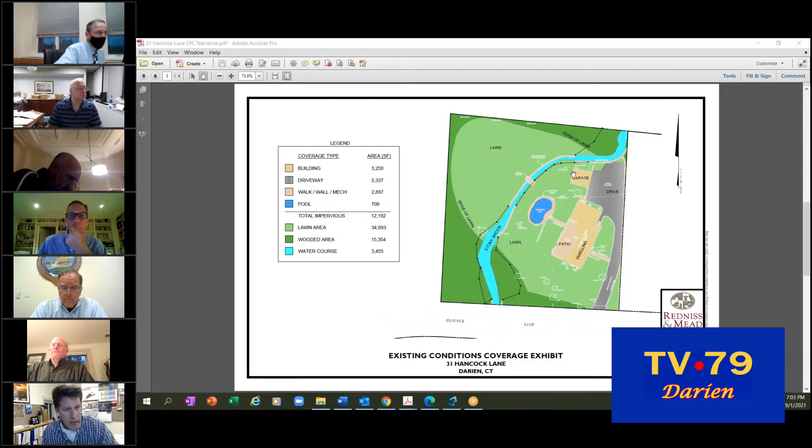All right. I hope you see it as I do, which is a project that is going to have a positive net benefit on the adjacent downstream wetlands and water courses.

Very specifically, you see here on our color plan the existing condition for 31 Hancock Lane. This is just east of Hollow Tree Ridge Road on Hancock Lane. You see in clear light blue, the Stony Brook cuts through the middle of the property. You've got the existing drive on the east side of the property leading to a detached garage quite proximate to the brook.

And the driveway, in fact, pretty much abuts the brook on that north edge. You've got the existing residence and patio on the east side of the property here, and you also have an existing in-ground pool between the existing residence and the brook. A fair amount of the property today is maintained as lawn.

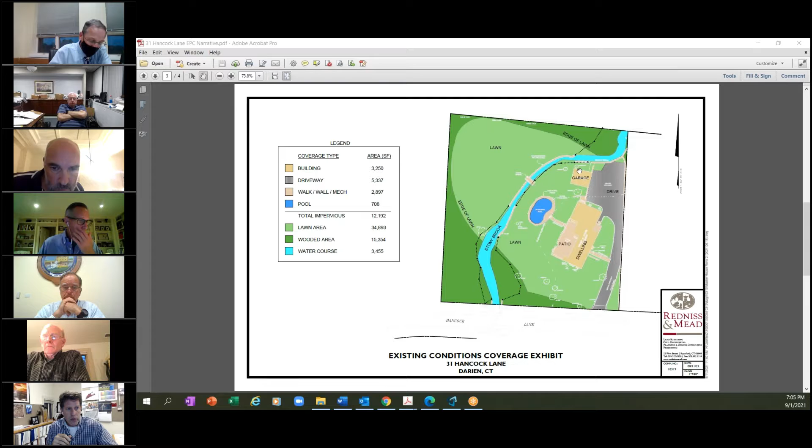So I'm going to toggle between the existing condition and the proposed condition to give you a sense of the changes that are going to be made. So it's existing, and here is proposed. You will note very quickly, if you focus on the garage and the driveway here by the brook and the pool, that as I toggle to the proposed condition, those elements all go away.

So the driveway is pulled back from the edge of the brook. The detached garage is removed, and a new attached garage is created closer to the main dwelling. The pool is removed and not replaced. And then there's some additions around the main dwelling.

A lot of the additions have to do with the desire by the applicant to have a master bedroom down. He's an older gentleman and just at the right life stage for that choice. So we have a lot of pluses and minuses on that main living floor to make it usable for the new owner.

So at the end of the day, we've got a net reduction in impervious coverage of something like 1,600 square feet, immediately improving drainage conditions off the property. We are moving some of these hardscape improvements like the garage, the drive, and the pool farther away from the resource. The pool is gone entirely.

The other things that happen are the existing septic system is actually set in groundwater and it's not doing very well.

We've got to replace it. So we end up replacing the septic system with a code-complying upgraded system that will function better than the one that's out there today.

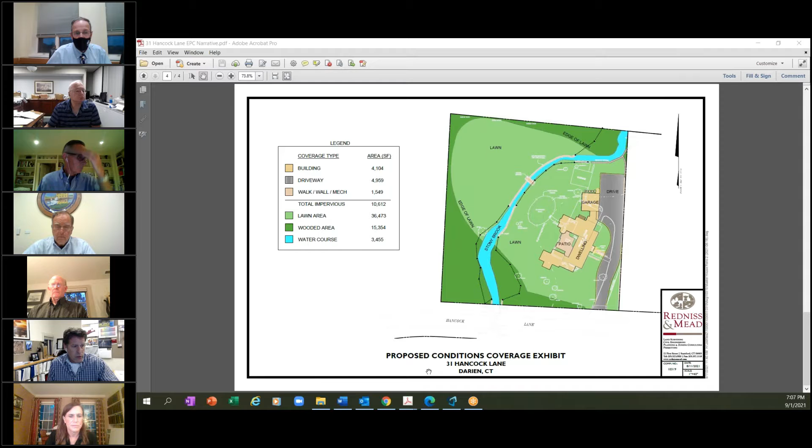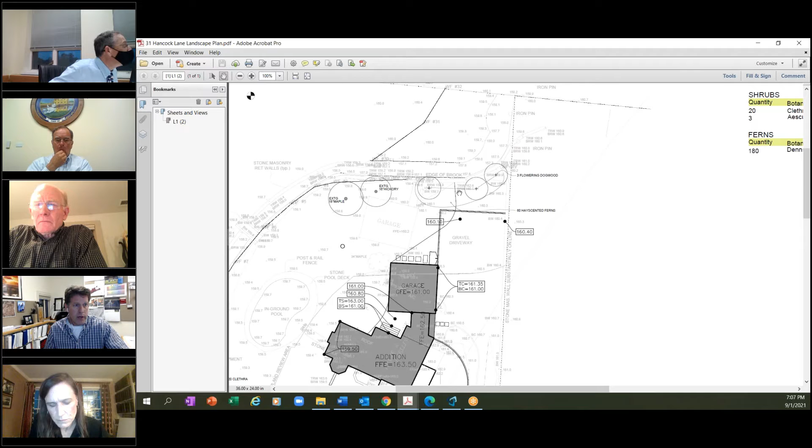In addition to all these items, we do have a landscape plan, a little harder to see virtually here on the screen, but you've got it in your paper packets if you've been looking at it. Very specifically, we focused on 2 mitigation areas to provide more ecologically friendly plantings, or at least not maintained lawn. So we have a planting bed here where there used to be driveway adjacent to the brook 80 hay-scented ferns and 3 flowering dogwoods.

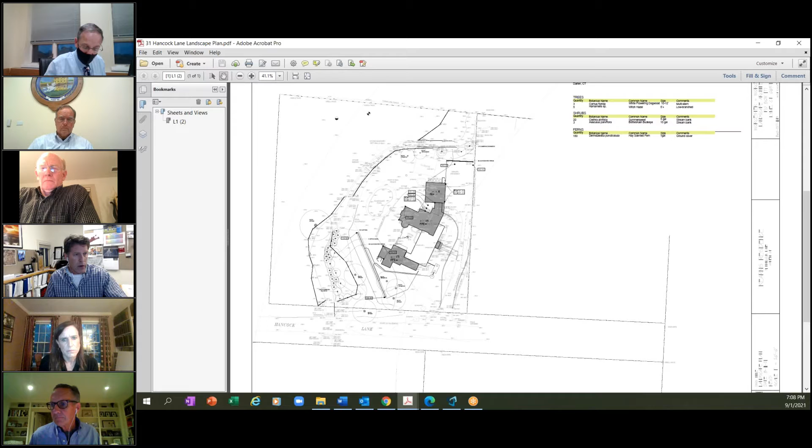And then we focused on the area downstream of this proposed addition, being really kind of a new area and the new septic system. So there's a number of shrubs and trees and ferns, again, being planted in that vicinity as well to augment the buffer to the brook and kind of repopulate that wetland with more natural plantings.

So that's, I think, pretty much the sum total of how we feel about the new improvements as they might relate to the resource.

I should note, just for full disclosure here, although we've got a wetland setback indicated on the plan, it's just the 50-foot wetland setback. And of course, as you know, the Stony Brook has a 100-foot upland review area associated with it, not a 50-foot one. I don't think that really affects the net positives you gain from this application, but I thought I ought to point it out since it wasn't correctly indicated on this exhibit.

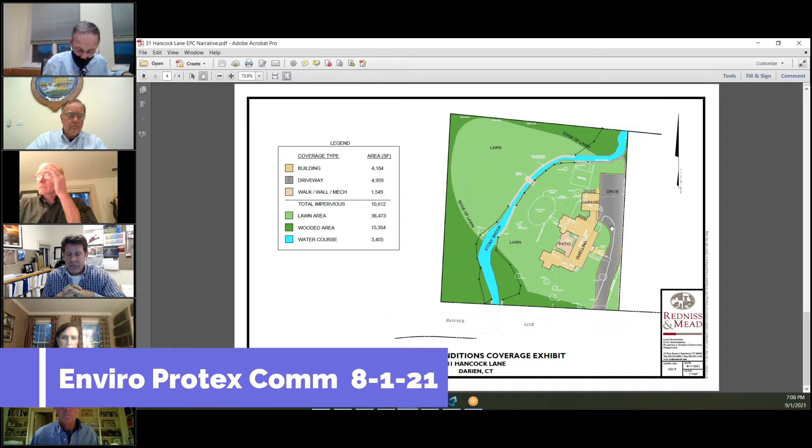And I'm here for your questions. Good, thank you. I'll start with Bill Wright.

I'm very interested in what happened during that 6.5 inches of rain in that location. Obviously, it's in a low area there, and it's been very channeled. But can you tell me what happened on the property when that occurred, and also what happened on the street?

Yeah, so the applicants were not in-house during that storm, so I have no observations from the storm. I do have observations from the storm for the property to the south at 21 Hancock, I think it is, or just across the street, the Morgan residence. I actually have some video there. Their flooding wasn't as bad as it had been in the past, and it was largely confined to a little bit more than the brook.

We've done this in association with our planning and zoning application. We've done a very detailed flood study here because FEMA doesn't assign an elevation to this location. It's too far afield from the main river where they actually have assigned elevation. So we actually went through the process of doing a flood study to figure out the watershed to this property and coming up with a flood elevation.

The flood elevation, even in the 100-year event, is predicted only just to lap up against the edge of the house. The house has never flooded in the past. So I would guess that based on the stuff that I saw for the property just to the south, you might have had water coming up over the banks, but probably not any closer to the house than the pool. Okay, because it does make a really right-hand corner there.

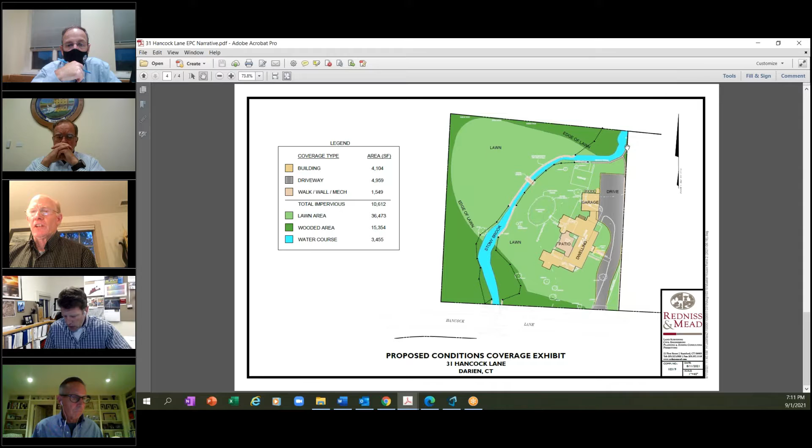So I'm surprised. I guess that retaining wall back there is holding it back. Exactly, that's a pretty stout retaining wall. I don't know if you've seen it in the field, but it's a good at least 6 to 8 feet tall.

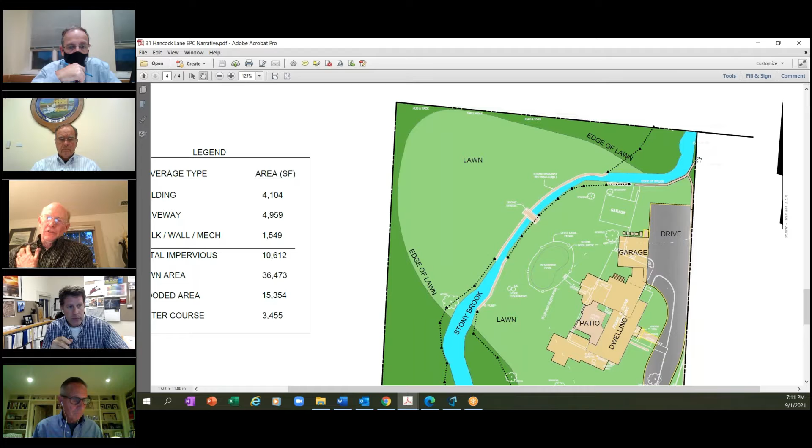Was built by some prior owner to serve that purpose of making sure the brook was deflected from the house. And how about the road? There's 3 culverts down at the end. You don't think it went over the road down at the end as well? Yeah, it has gone over the road in the past. Back in the 2007 storms, it went over the road. I don't have confirmation of whether or not it went over the road.

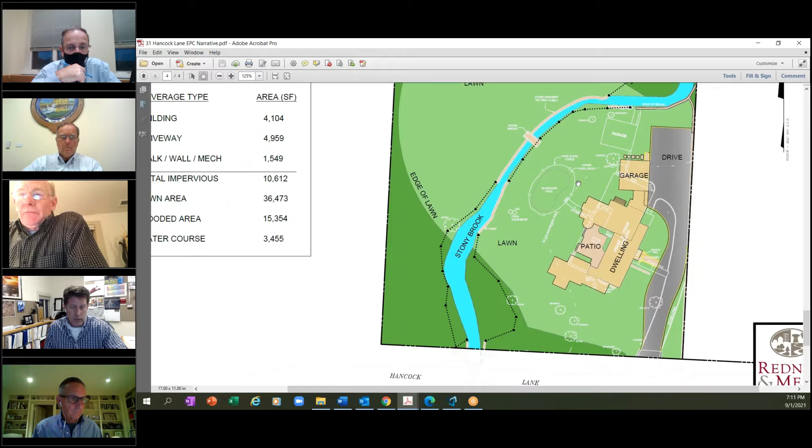I guess the only reason I'm bringing this up is Stony Brook took a lot downstream. It really wiped a lot of places out, and this is a tributary to that up there. So I'm just concerned, I don't know if there's any way to improve that. Obviously, that's been channeled out so dramatically, there's probably no way to slow it down. But I guess the other item is that with only 25 feet from the wetland zone is the new septic. And if that gets flooded over the top, I don't know how that operates, but I can't imagine having a lot of water over the top of the septic is good for a septic efficiency system. So I don't know, I mean, I wish you could push that septic back further. And I guess there is no sewer systems up there.

There's no town sewer system on that road. No, the town sewer is not close.

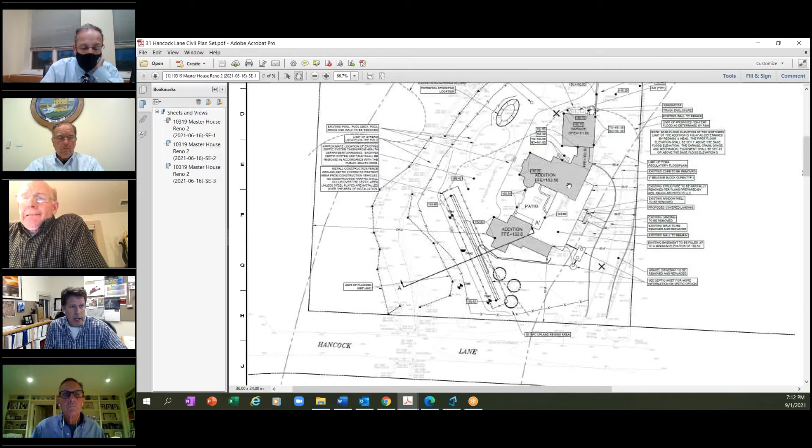We did indicate on the more technical civil engineering document where we're predicting the 100-year flood elevation on the property, so it's right at the edge of that system. And that's again the 100-year storm, not these slightly less intense storms we've been seeing, although they've been pretty intense. So I wouldn't expect that a storm like July would reach it.

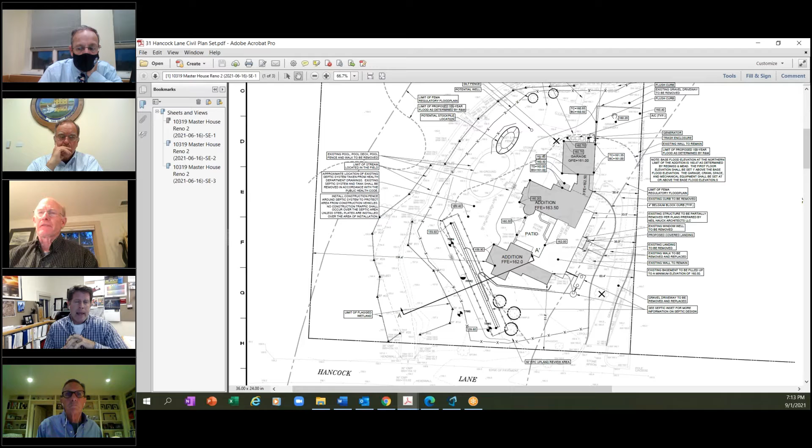What did they consider that storm? Do you know what that one was considered in our year? Every storm, every watershed has its own critical storm. When you have a larger watershed, a storm has to rain for a longer period of time for all of that water to get to some common downstream point. If you've got a smaller watershed, the critical storm could be a very intense thunderstorm that only lasts an hour, because that's the critical storm for that watershed. So every watershed is a little bit different.

But I would say for the Stony Brook watershed, which is larger, it was something more like a 25-year event that we saw on July 9th. For some smaller, flashier watersheds, it was more significant because, if you remember, it rained a couple inches the night before, then stopped overnight, and then rained about 4.5 inches in 3 hours that morning.

The only other comment I have is, because you're only 25 feet from the wetland, it would be nice if that whole wetland area - I'm talking about the south section - was populated. You've done a section of it, that's good, but it'd be nice if you populated it all the way to the wetland line and then put some demarcation there that would permanently prevent it from going back into lawn.

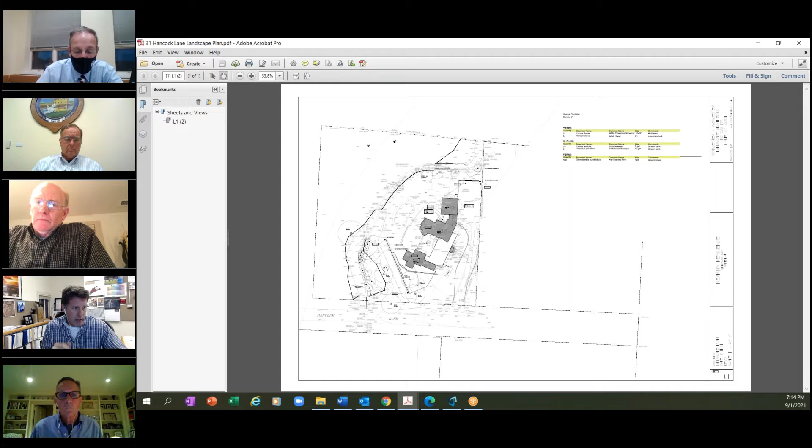So somewhere between the septic system and our proposed plantings on the landscape plan, you would like to see physical demarcation? Yeah. Okay, that's fine. I think that would be amenable to doing something like that. I wouldn't want to do a fence for it - that might be its own obstruction, but maybe some artfully placed boulders might work in this scenario. Yeah, thanks, that's all I have. Thank you.

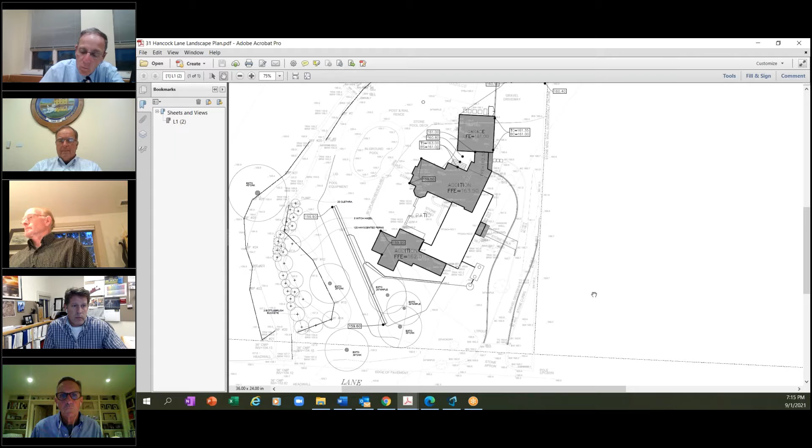Michael Irvin? Appreciate the applicants. Can't hear - your volume is very low. I'll talk louder. So Craig, I appreciate the applicant's design and I have no questions. Thank you. Thank you.

Jim Millard? Consistent with Commissioner Irvin's thoughts, I have no additional comments, Mr. Chairman.

Okay, thank you. For me, Jeremy mentioned that this is going to go in front of Planning and Zoning on September 14th, and it will be a public hearing, because it's a substantial alteration and addition, not a replacement house. And also, from my view, he's reducing the impervious surface and reducing the encroachment in the upland review area.

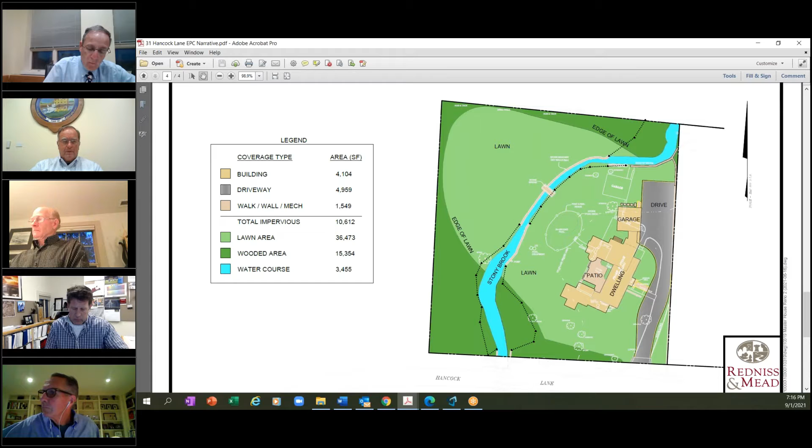I don't think it's necessary to have a public hearing from our perspective, because I think there's net good coming out of this. And so I think that if there are other issues, they can be appropriately raised in Planning and Zoning, and they can manage them. Is that fair, Jeremy? Okay. So unless another commissioner would like to speak, I think we'll draft it up for the next meeting.

Thank you much. Thank you very much, Craig. Yep, thank you very much. We'll see you next time. Okay, quick question - is that application, Jeremy, going to Planning and Zoning for filling and grading? It's going because it's work in the flood zone, Michael. I think there's, because they're doing some of the work in the flood zone there. Okay, thank you. Sure.

Okay, the next item is EPC 31, 2021. Bob Johnston and Susan Latimer, 19 Meadowbrook Road, proposing culvert replacement within the Tokeneke Brook. The site is shown on Assessor's Map number 14 as lot number 9.

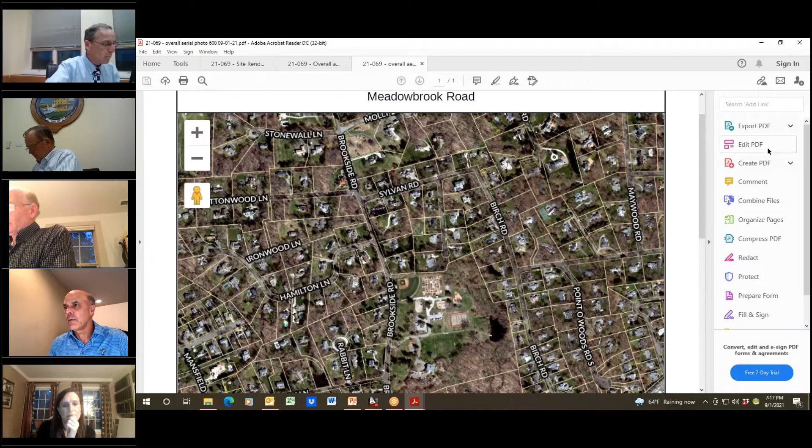Is that Doug? Yes, it is. Okay, Fred, got the screen? Yep, thank you. There we go. Okay, let's get this going.

Good evening, my name is Doug DeVesta, professional engineer, representing the applicant. What we have before you tonight is a head wall. I'll show you some pictures. First, I'll give you an idea where the property is located. Here's Brookside Road, here is Meadowbrook Road, a private road with a number of houses on it, about 8-10 houses.

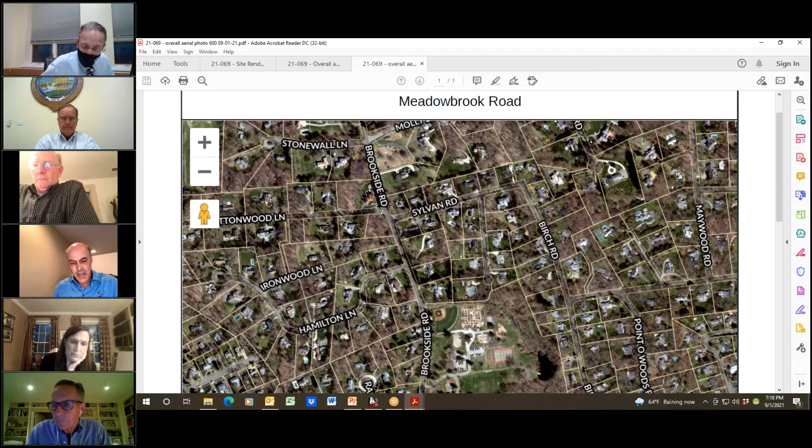It's got the Tokeneke Brook that comes through it, which starts up close to Three Wells Lane, goes under Ridge Acres, Molly Lane, Sylvan, and parallels Birch Road, going through a couple of small ponds in there. This is Cherry Lawn to the pond, and then comes on down. The blue circle here is where the Tokeneke Brook comes through, underneath the road, which is actually a true driveway that services the house on the north and south of the property.

And this is the— wait a minute, I lost that one.

Okay, so what I'd like to do right now is go through a presentation of some slides that we took of the area, so you can get an idea of what we're looking at doing here. This is looking to the east over the culvert.

This is the end wall. To the right is the south end of the end wall, to the north is the head wall. There's plates over here where the road is collapsing.

The next slide is looking west across the driveway serving the two houses. The next photo is the culverts—you'll see this is the Tokeneke Brook. You've got 3 barrels of 36-inch reinforced concrete pipe, or RCP. This is the end wall.

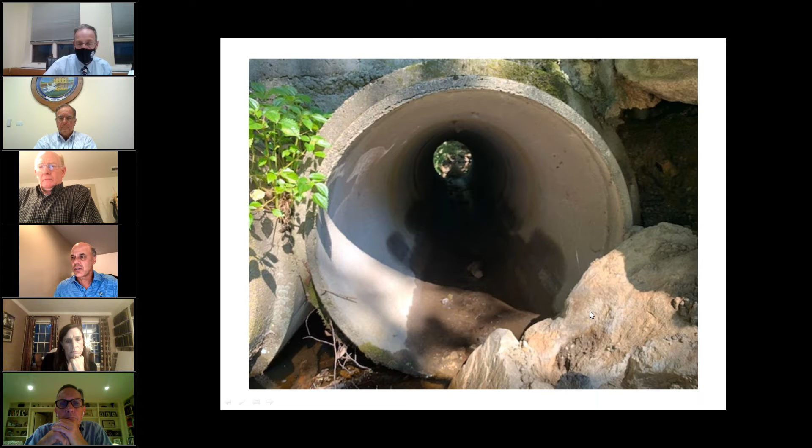Next slide here shows that the wall is starting to crumble down from the easterly pipe. This is the most easterly pipe—looking through it, it's in good condition. This is the stone from the end wall that's blocking it.

This is the middle pipe. Looking through at this end, the pipe all looks like it's in good condition. And this is the westerly pipe, looking back up to the north. This is again looking east at that crumbling part of the end wall.

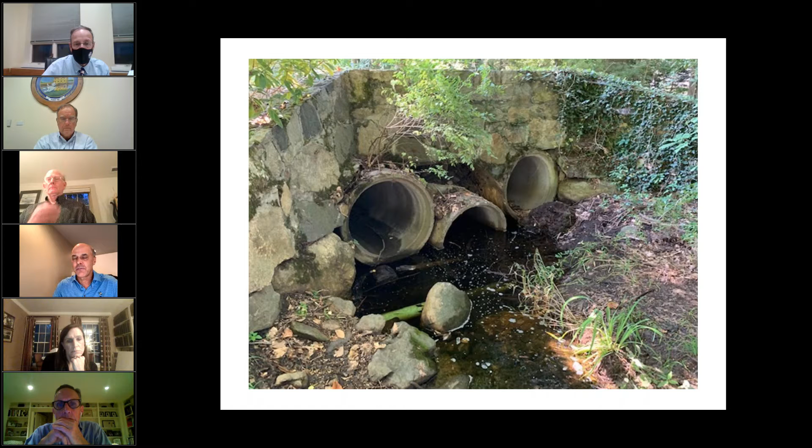Looking now we're on the head wall looking south, so you can see the 3 barrels. The middle barrel pipe has fallen down, but has not cracked or anything like that.

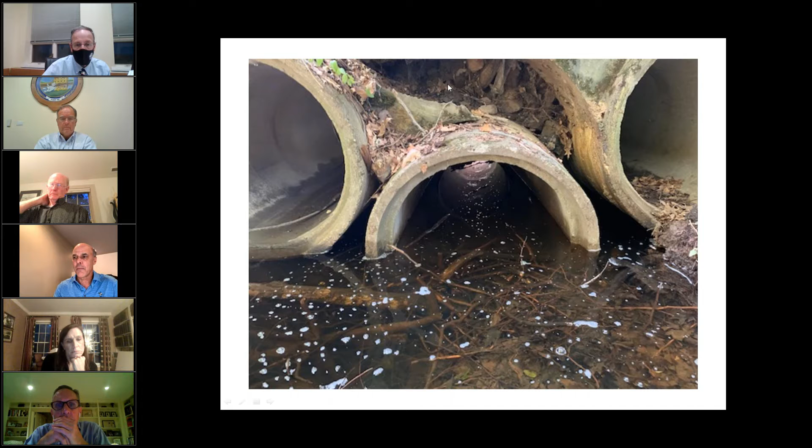This is the easterly pipe again, and this is the center pipe. Looks like what's happened is that over time, the brook has eroded the material underneath the pipe itself, causing the pipe to drop, and causing the road above it to have a sinkhole in it.

And then this is another picture of it. You can see the pipe is in good condition. You can see the pipe going to the south that's still in good condition, but you can see the head wall has collapsed and the dirt behind it has fallen out, which is causing that sinkhole up on the driveway.

The next one is the westerly pipe—it's also in good condition. You can see that some of the dirt around the pipe is starting to erode away.

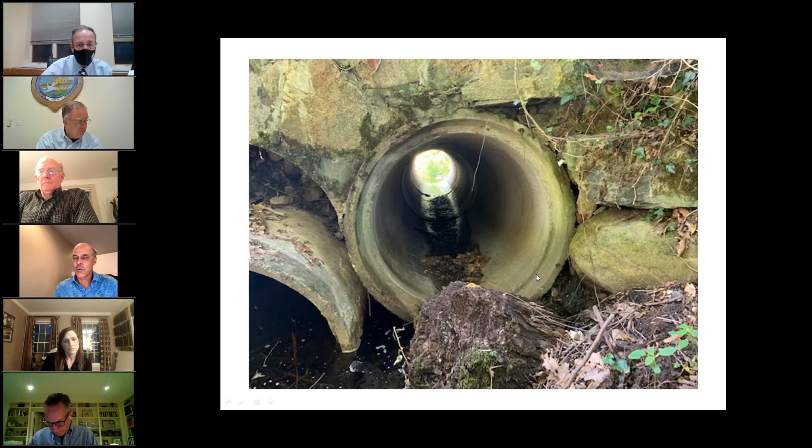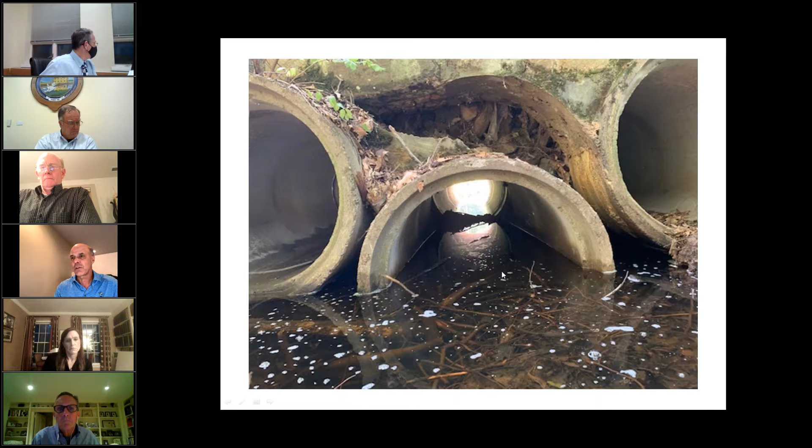If you go back one slide, you'll see that when these pipes were put in, they were placed right next to each other, with really no area to compact the material around it or get it around the sides and on the bottom of the pipe itself. So over time, this has eroded and caused it to collapse.

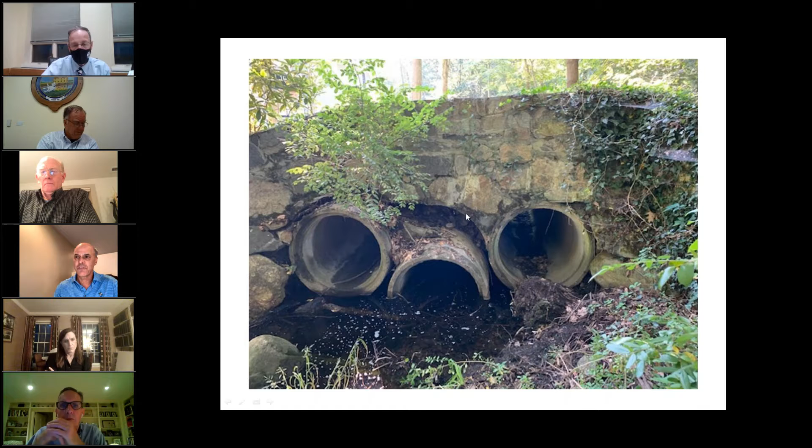The next picture is just an overall view looking down at the pipe, and you can see how much has eroded and how much has fallen down on the pipe. And then the head wall is not in the best of conditions.

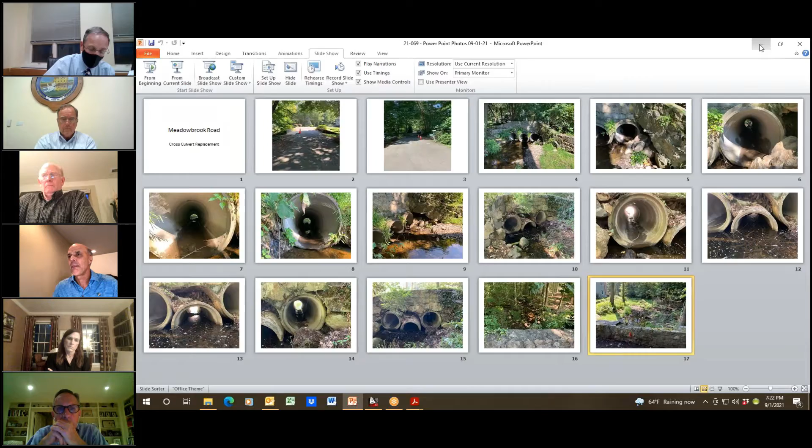So our proposal is to remove and replace the 3 reinforced concrete pipes, construct a footing underneath the inlet and the outlet of the pipe with concrete, and then place the pipes back on it, and then backfill it.

So we're reusing the pipes that are out at the site, repacking the dirt around it with a 2-foot gap in between the pipes so we can get good compaction, bringing it all the way back up to final grade, and then repaving the driveway as it is right now.

We're also proposing to put a modified riprap in front of the pipe, and then modified intermediate riprap on the outlet side to keep the erosion down and to provide some additional protection.

This proposal is also to provide a temporary sandbag dam on the upland, inlet side of the pipe itself. And if there's any more water flowing through here, we'll pump it around to a dewatering pit area that will be constructed with hay bales with riprap inside it. The water will come in here, slow the velocity down, take any sediment out, and allow it to trickle back out into the brook.

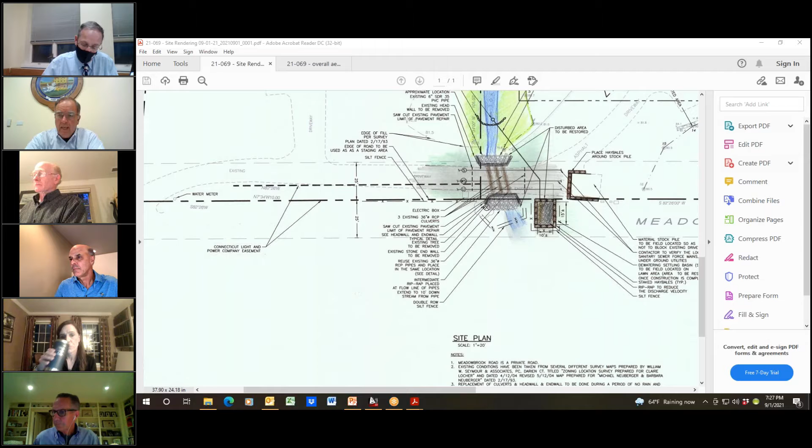Yeah, I'll add, for me this is a safety issue, because obviously you don't want to drive your family in a car over this where the bridge could literally collapse and then talk about issues. So I think Doug's solution is excellent, coming up with the culvert. As far as I'm concerned, this is a go.

The only thing I'd add, and I'll speak to the adjacent homeowners along the river: they should be careful about putting brush and leaves along the side of the stream, because when you have a major event like we're going to have tonight, that'll wash in and block up the stream, and that's the last thing you want on a night like tonight. So if the homeowners on both the north and south could just be aware of that, I'd appreciate it.

Jeremy, you want to write up the draft for approval for next month? Sure, we'll put together an approval for next month. Great, thank you very much. Thank you very much, guys.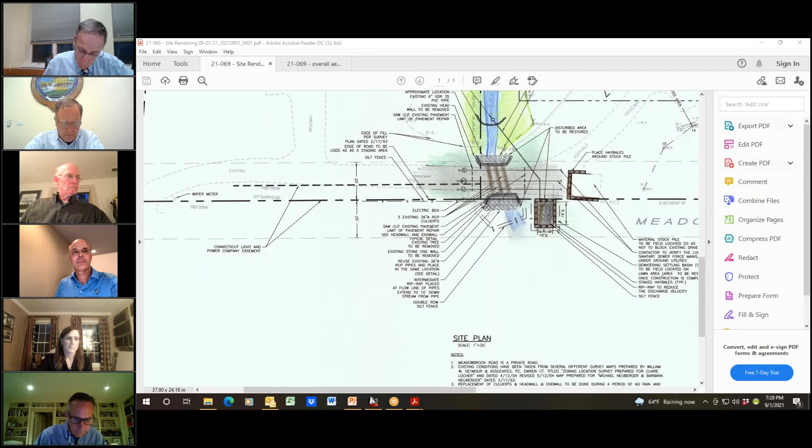Okay, moving on. The next item of business is EPC 32-2021, 91 FMRR LLC, 91 Five Mile River Road, proposing a replacement house and related grading construction in an upland review area. This site is shown on Assessor's Map number 66 as lot number 20.

Who's representing the applicant? Lee? No, Andy Simulidis. Andy, are you there? Excuse me, I'm here. Hello. Good evening, Andy Simulidis, Principal and Professional Engineer with Landtech in Westport, on behalf of the owners of 91 Five Mile River.

The property is bounded by Five Mile River Road on the west, with residences to the north, east, and south. The southeast corner of the property, about 3 feet, abuts the Five Mile River, so it has about 3 feet of frontage along the river. It's one of those peculiar corner-type situations. The property is an existing single family residence with a detached garage, serviced by city water and sewer. The proposal is to demo the existing house and garage and build a new FEMA compliant single family residence.

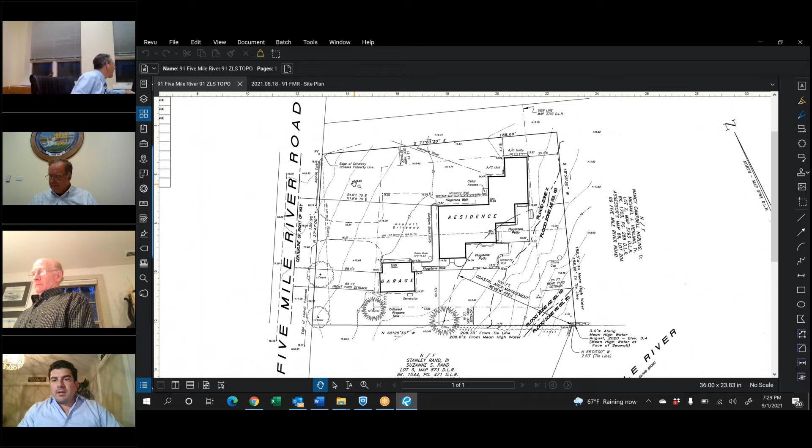Here you'll see the proposal for a new single family residence with an attached garage. The driveway is coming off Five Mile River Road in the same general vicinity, central to the house, with garages both to the north and south. The proposal also includes a new pool and patio in the rear of the property.

I'd like to point out a portion of the property is within the flood zone. This boundary delineates that to the east of that line is flood zone VE15, a high velocity flood zone. To the west of that line is flood zone AE13. Then this flood zone line indicates that to the east of the 13 we mentioned, and to the west of that, it's flood zone X, meaning basically no flood zone beyond that limit. The proposed house will be entirely outside the flood zone.

A small portion of the proposed patio and a portion of the pool will be within flood zone AE13. The proposed single-family house will be at elevation 16.5, above the VE of 15 also — even though it doesn't need to adhere to those FEMA guidelines, it is still elevated in such a position. The house will also be outfitted with a basement, since we're outside the flood zone that would be allowed. In terms of drainage improvements on the existing lot, there are currently none.

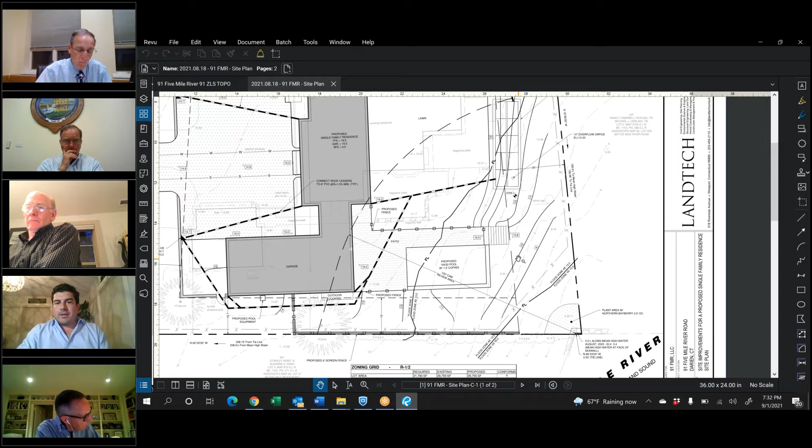What we've also added to this proposal: in this small corner below the seawall, there are some tidal wetlands. We added a planting area of Northern Bayberry, a 10-foot planted buffer just along that corner to further protect it. It is already pretty densely vegetated, but we've added some additional measures.

So that, in a nutshell, is our proposal. I'm here to answer any questions.

As Jeremy will allude to, this will need to go before the P&Z Commission for a CAM site plan approval, which will most likely need a public hearing. And has that been scheduled yet? No, they're probably going to submit — it'll probably be October or November. Okay, in the October-November framework.

Do you want to point out exactly where our area of jurisdiction is? Sure — there is a 100-foot buffer from the coastal resources. That's this corner, this dashed line here. So a portion of the existing house and patios are within it, but predominantly this area is mostly all lawn area. What really falls within that is the pool and patio, and the corner of the garage.

Okay, let's get some questions and comments. Bill Wright — I don't have any. Michael Urban — similarly, I don't have any questions at this time. Thank you. Okay, Jim Millard.

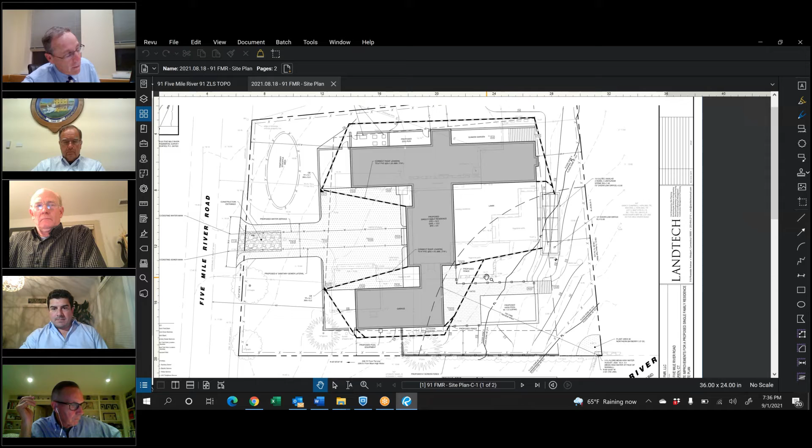It's in the R-1/2 zone. So you got a rear yard of 25.5, and the pool looks to be about 30 to 40 feet from the edge of the seawall. Other than that, it's just grading, and they're putting in the water quality unit in the backyard. The Contech units address water quality prior to draining into the Five Mile River.

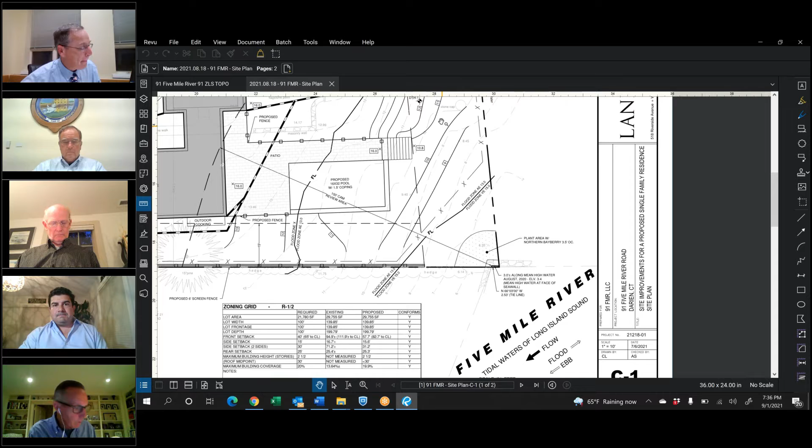Jeremy, thank you. Apologize for my naivete. I just wanted to be sure that I was understanding it better than I originally was.

Thank you so much. Yep, there's a lot of lines on the map, but the big lines are the drainage lines flowing into the water quality Contech.

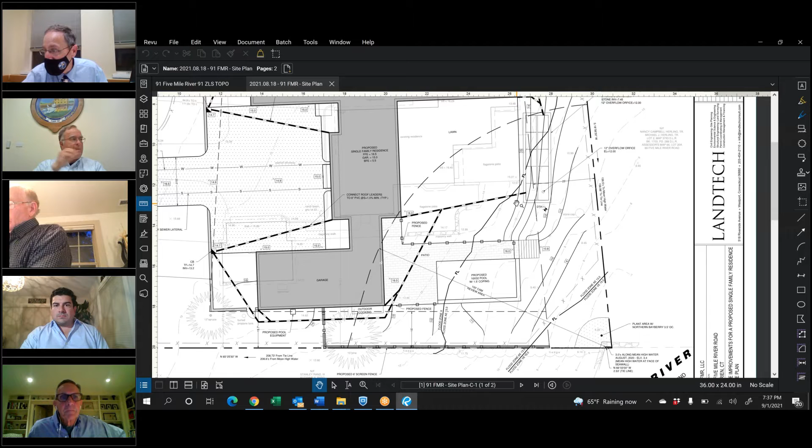Jeremy, just want to make sure that the plantings are Connecticut native species. Yes, the northern bayberry. Okay, I got it. That's good.

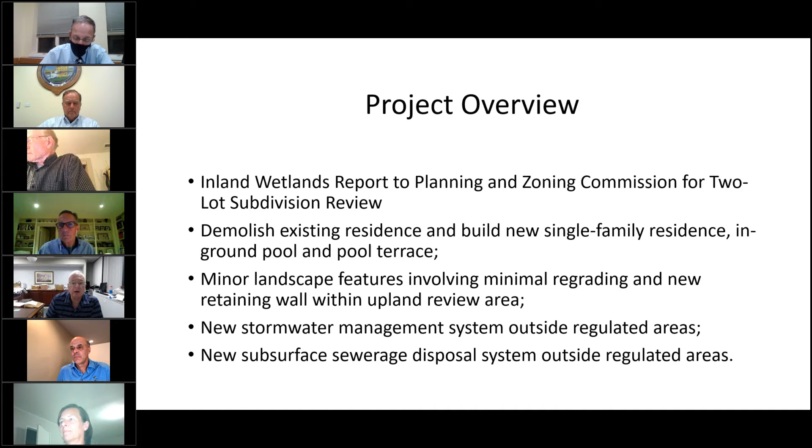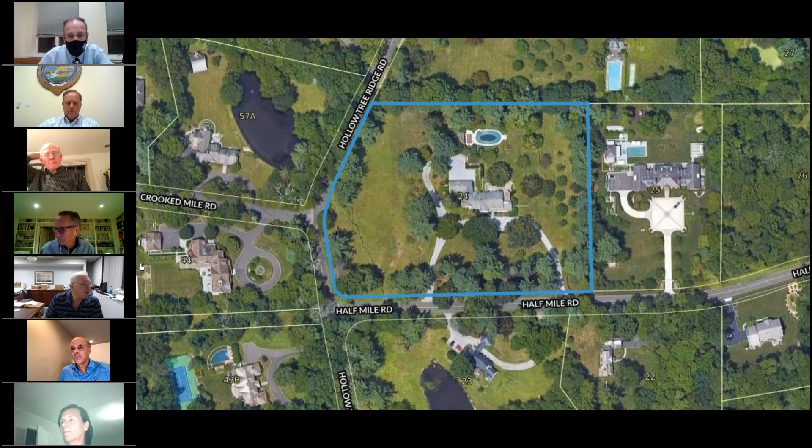This is an aerial of the neighborhood the property is in. I'll zoom in a little bit. The houses and existing boundaries are outlined in blue. This little squiggly line is the water course I've been talking about. It's between a pond across Hollow Tree Ridge and another pond on the property across Half Mile Road. As we get into more photographs, you'll see this is anything but a natural water course.

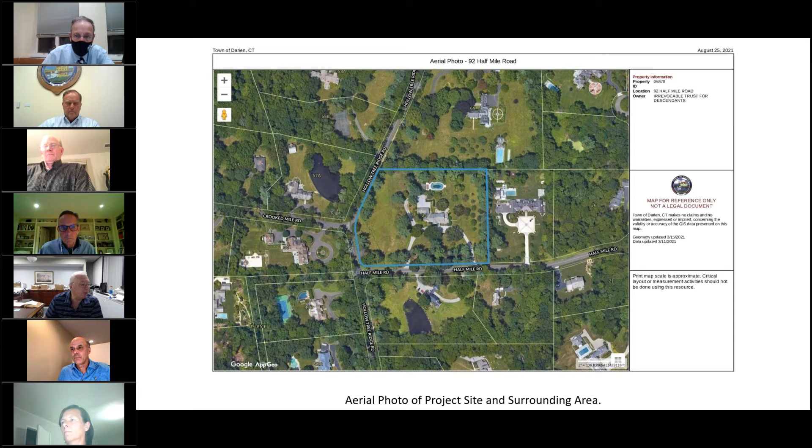Both sides are expansive lawn, and have been that way for many years. This is from Alexandra's report, just another close-up. You get an idea of how this little water course runs, and you can see the extent of lawn down on this whole side of the property.

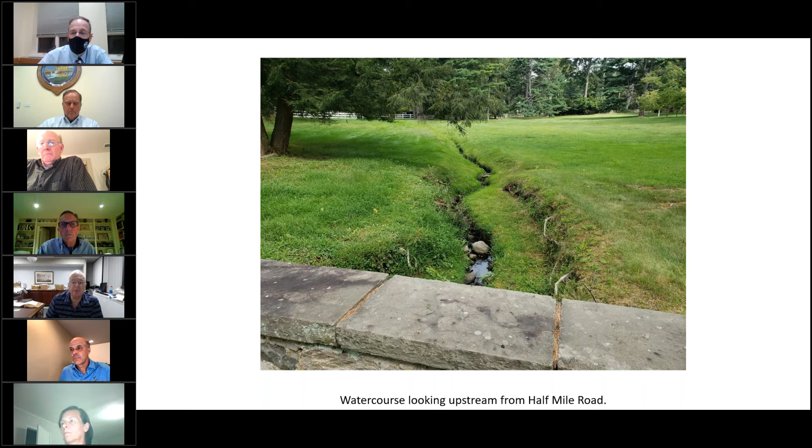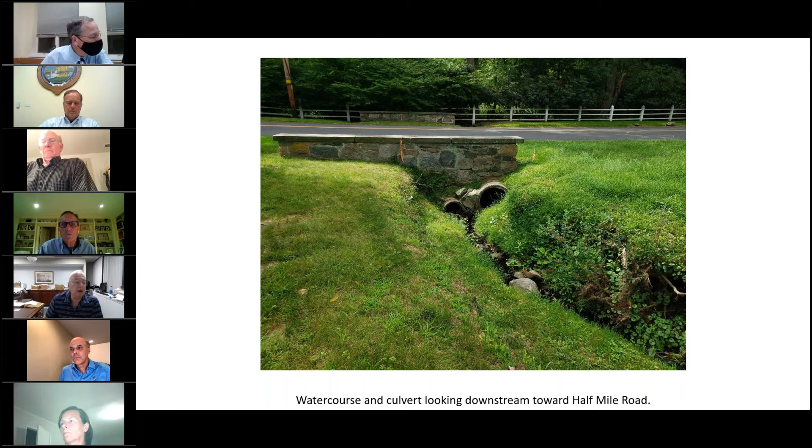Close-up views of the water course itself, nothing really spectacular. This picture is from the Half Mile Road end looking upstream. This is the same place but looking through the culvert and across Half Mile Road. This is the other end, looking downstream from the Hollow Tree Ridge Road end. And this is in the middle of the yard, again looking downstream. Hollow Tree Ridge is over here, Half Mile Road's down here.

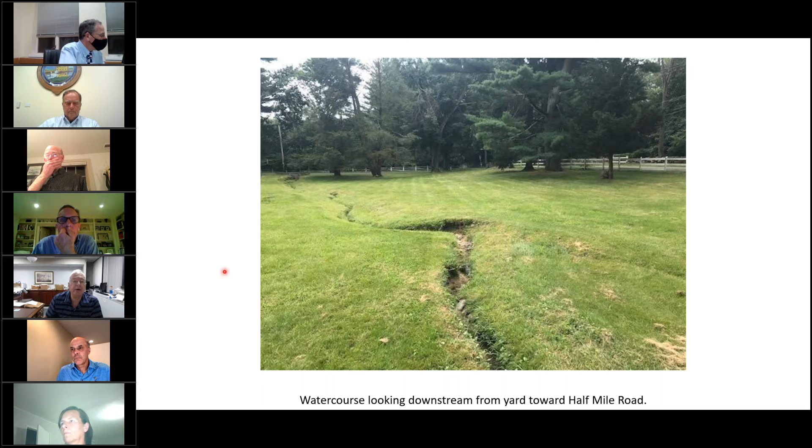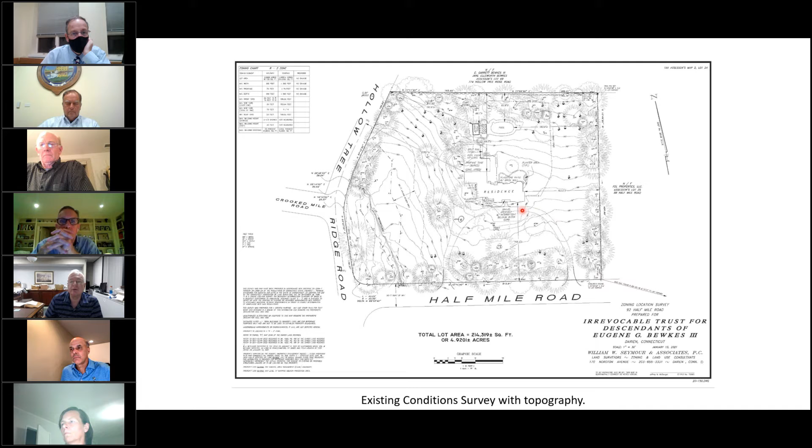Existing site plan, you'll see the house right in the middle of the site. There's a swimming pool behind the house, and these contours indicate a slope down from the northeast toward the southwest. The wetlands have been flagged and surveyed here, Alexandra did that fairly recently. The wetland boundaries are shown on the survey, which Jeff did. He marked the 50-foot upland review area here, and there's a corresponding area on the other side, but the only activity down there is some upgraded landscaping. So that's the existing condition, circular driveway running through, just under 5 acres of land.

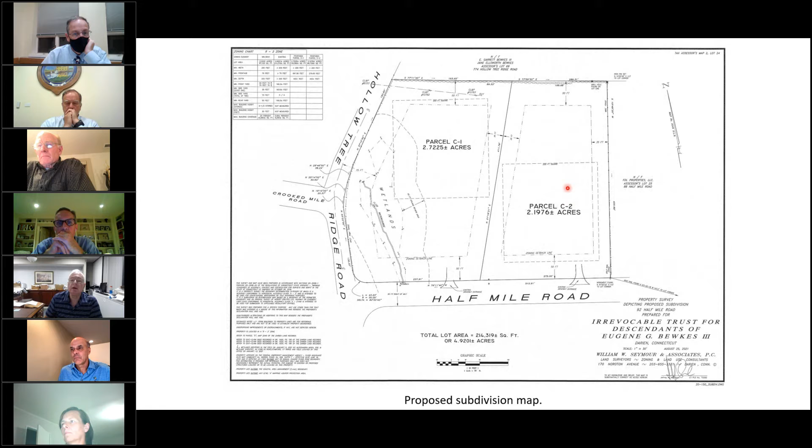The plan is to divide the property in two with a line running roughly north-south, creating 2 lots. As you'll see in the site plan, we have a house proposed on parcel C1 and a conceptual development on C2, but that's not in the cards right now - that's for the future, basically a feasibility study or just a concept.

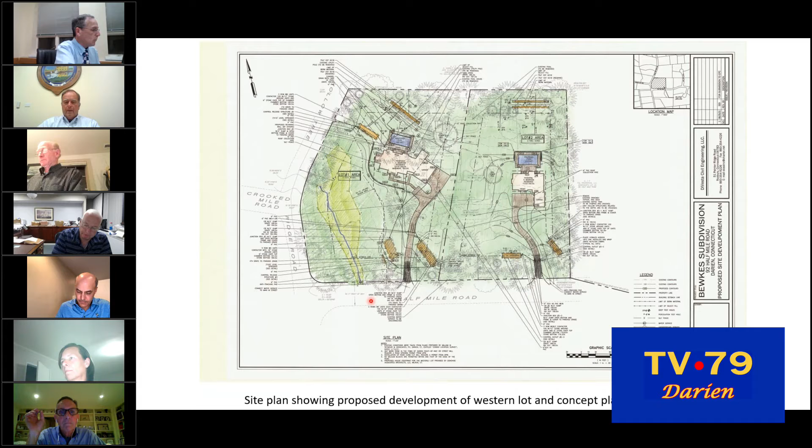Michael Irvin: So Commissioner Wright, to quote Craig Flaherty, you'd like to see some artfully placed boulders in the buffer. Yeah, that's a better way to say it, I guess. Yes, but I concur. I have no further questions. There's no such thing as an artfully placed boulder. We'll come up with something. Well, it doesn't have to look like I-95. No, that would not look good. It's a better look.

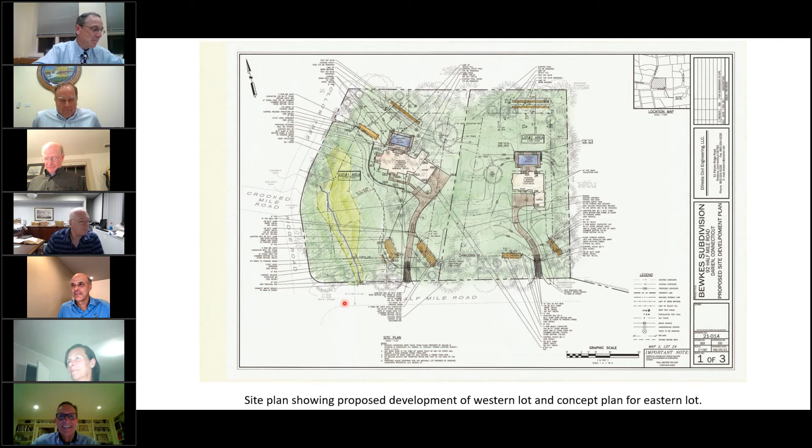Thank you, Jim. Yes, Mr. Chairman, I don't know that I should take much time of this meeting, but I'd like to, at some point, sit with Attorney Maslin and talk about the four years of Latin I took in high school—thoroughly enjoyed every minute of it. He and I could probably compare notes and stories that would quickly come to mind. Well, you can have the exam, Jim, of reading off the Latin names of Alexandra's plantings and see if those four years paid off. I think they did.

Would that be a condition of the application, so we have a neutral observer?

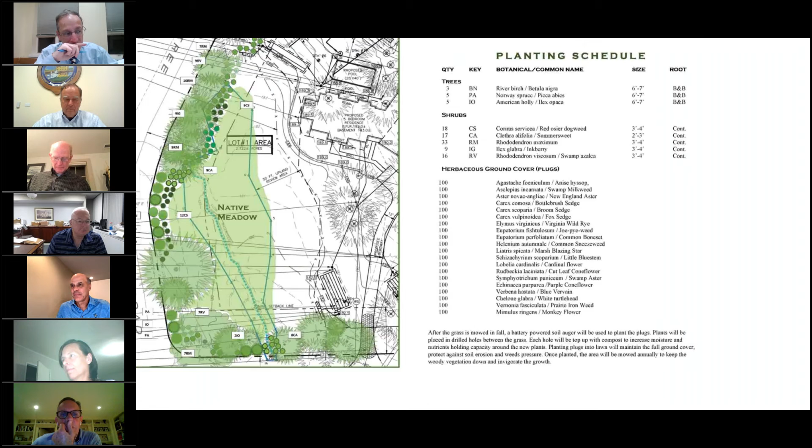The only other apology I offer to tie up this good meeting is that all of us have spent many years in the town of Darien—myself, 37. And all of us, as we drive around or ride bikes or raise our children here, have a home or two that jumps out as one of our favorites. This is one of mine, driving Half Mile Road often, Hollow Tree Ridge Road often. I think it's a beautiful home and a gorgeous setting. Maybe I'm getting older as this plan is submitted, and I understand why. I think its presentation is first class, pretty much as usual. I look forward to next steps here, Mr. Chairman.

Okay, thank you. I think Alexandra's come up with an excellent plan for planting there, bringing it back to native vegetation. Alexandra, my one question—you don't have to answer it now—is in your report you said the brook sort of goes where it goes. It's been eroded, the banks aren't very secure. What would you recommend—just let it be, or is there something we could do to improve the situation? Alexandra Moch, for the record: I think as we slowly turn this into a meadow and keep introducing deeply rooted species, this will really help and make a difference. I'm not sure we're ready to armor this with stone. I think that might be going too far.

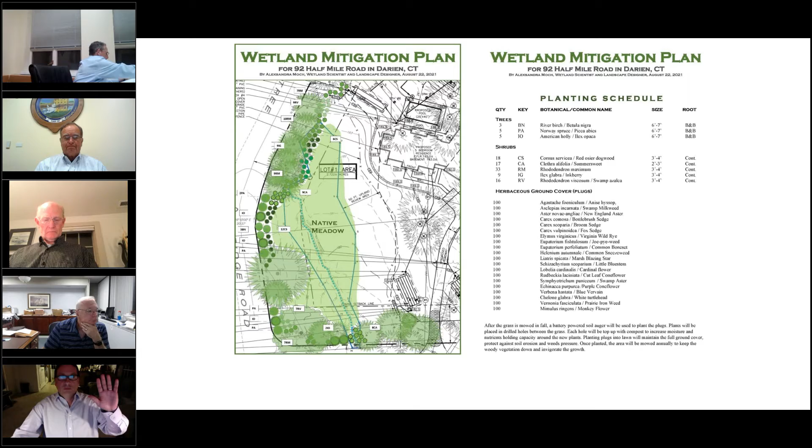Who's representing? I guess Sean. Sean Walters, you're representing the applicant. Yes, good evening, Mr. Chair and members of the board. Thank you for your time. Sean Walters, landscape architect, working with Wagner Pools on this project.

I would like to share my screen. And we'll jump right in here. I've provided a set of working drawings for the project, and this first graphic gives you an overall view of the site. Most notably, you can see the proposed work area is situated between two recently flagged wetlands. It should be noted that the wetland to the north is currently all planted lawn, which is universally regarded as very unfavorable for a healthy wetland.

This next graphic on drawing 2 is simply a diagram showing types and percentages of various areas and coverages. Relative to the EPC's interests, we have this 50-foot upland review line that runs through the middle of the work, and over here the 50-foot upland review line for the wetlands to the north, the one that's all planted lawn. So the bottom line is you have about 890 square feet of proposed activity within the upland review area.

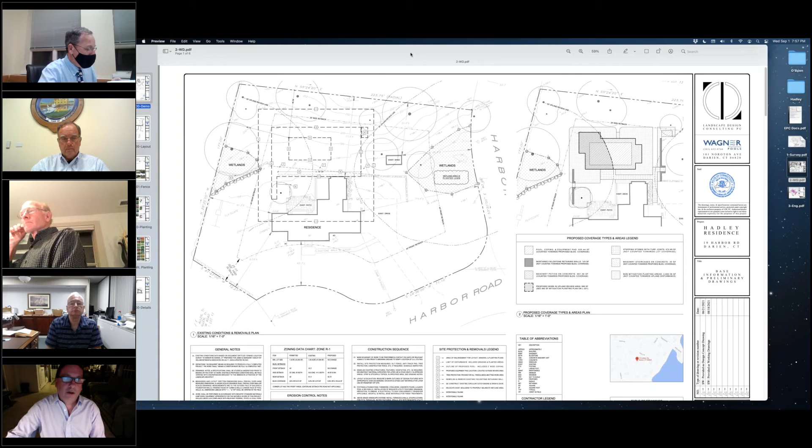I'm going to jump basically toward the end of the drawings. This would be L301, and this is what we're proposing to mitigate the swimming pool. This current wetland area that is all planted lawn, we're proposing returning 70% of it to a rain garden that's going to service the area. So essentially, we want to restore this wetland and return it back to what it should be with native plantings. In that regard, a lot of the post-construction footprint of this site is arguably less environmentally disruptive than existing conditions.

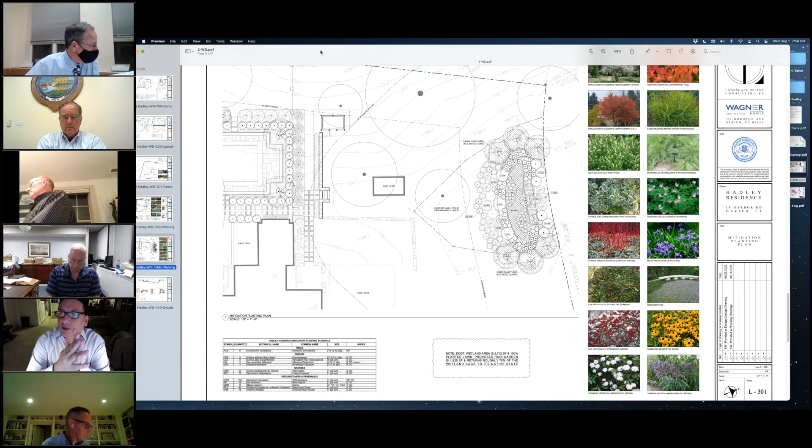And then, of course, this rain garden has been engineered. Here you can see the whole thing on plan. This is the rain garden down here, proposed pool up here, wetlands to the south, and of course the wetland area to the north. Thank you again for your time. I give the floor back to you for any questions.

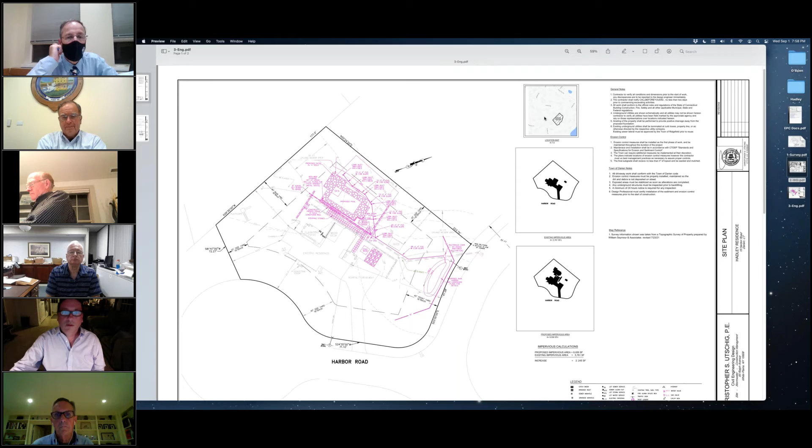Okay, Michael Urban, would you like to start? I guess my general question to my fellow commissioners is whether we're comfortable with the location of the pool relative to the actual wetland. I apologize, I'm referencing the wetlands to the left on the plan, so we'll call that the south wetlands.

The planting plan is very impressive, and the hardscape patio area is, I would say, robust as it relates to its proximity to the wetlands. I guess that's just a starting conversation point with my fellow commissioners if there's a concern with that. That's all.

Okay, Bill, right? Yeah, I was concerned it was close too. Although I hate to degrade wetlands, that one to the south is not a super one, it's small, so I'm not as concerned about that one, and I'm no expert by any means, but I understand it is close. I was more concerned about the one on the north side, which you're going to make into a rain garden, and maybe you could make Michael happy if you made 100% of that into wetlands recoup instead of just 70%. But I'll just throw that out.

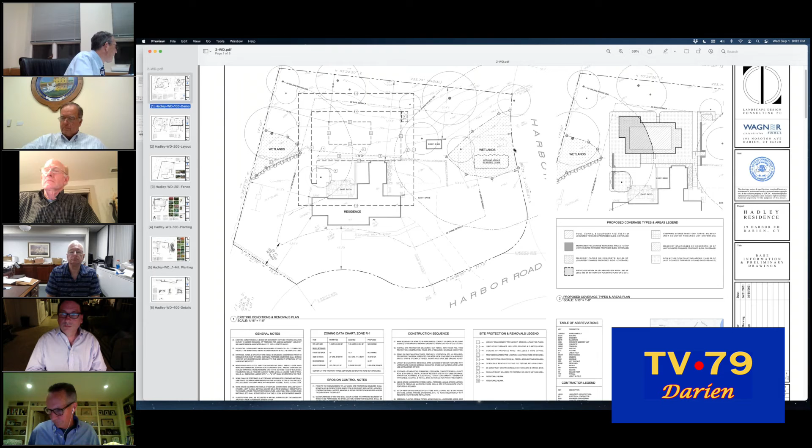Michael, you want to add something? I have not visited the site, for the record, and I don't have anything further to add. If we feel the applicant could improve the wetlands further, I'll default to my commissioners. It was just my observation seeing the proximity of the wetlands to the south on plan. Again, I did not visit the site, so I can't attest to the severity of the wetlands. Okay, that's it.

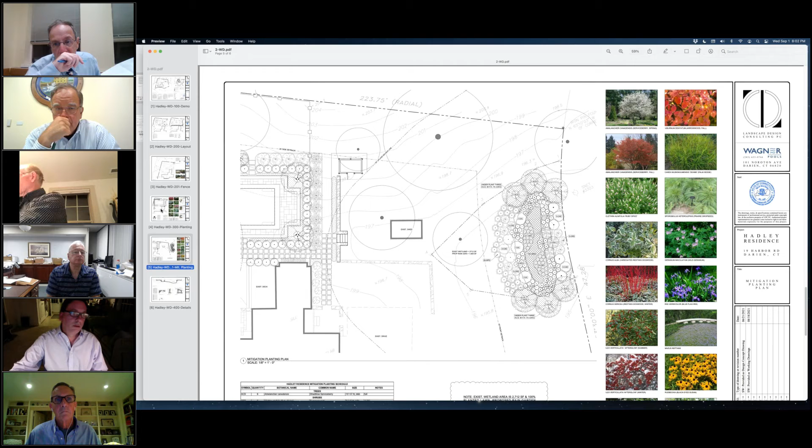Well Sean, you have a planting plan there, right? Yes, you're talking about the mitigation plan? Yes, I understand the north. How about the south? Well, the south is not really mitigation, this would just be poolside plantings, nothing invasive of course. But prairie fire crabapple, which is actually a food source for native birds. We also have hydrangeas, some hosta, lilac shrubs, and some liriope, and also some...

I thought I noticed some poison ivy there, so you may have to do some. I may have been seeing things, but I thought I saw some poison ivy. So there very clearly are invasives there. The ivy, by the way, poison ivy is not actually invasive, but obviously it's universally hated.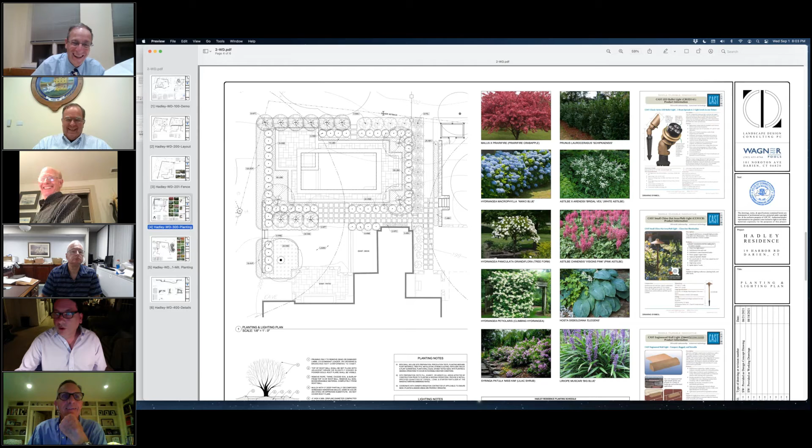But you are correct about something, there are some euonymus shrubs over here. Yep, and I did have a discussion with the owner about possibly taking those down, and I would offer that as hopefully an alternative to expanding this wetland. This is quite a robust plan right here, and these things are not easy to execute, as you know.

So what I've also done over here is, you'll notice there's some existing boulder work that presumably was delineating the south wetland. However, the recent flagging showed otherwise. So I do have a note to rework the boulders to more appropriately delineate the wetlands, thereby protecting it from additional encroachment from lawn maintenance activities, pesticides, and so on. So we are making an effort to do something on this side as well.

But this is really quite a rain garden over here at the residential scale. It's pretty robust. I mean, if we get much bigger, we'd have to put plaques and walkways and have show groups of students and things, it would become almost a nature walk kind of thing. So I felt like, well, that's okay.

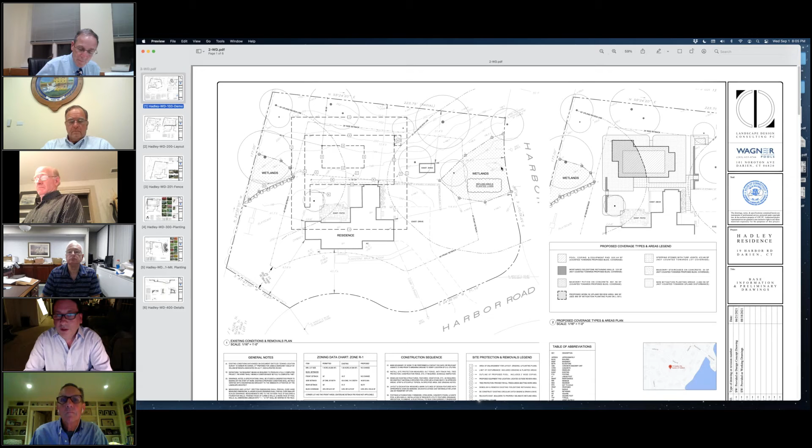I wanted to approach the board hat in hand with something that was robust, something that would say to you, hey, these guys aren't just trying to squeeze by. So in my opinion, I really felt like we're presenting hopefully what would be regarded as more than adequate.

The north side, I understand, but if they could work the south side into something that could be approved by staff, just to say there are the euonymus there that I'm not a fan of, things like that, just to improve that vision, if you will. And I'll let Sean talk to Jeremy, and whatever you two agree with, I'll be fine with.

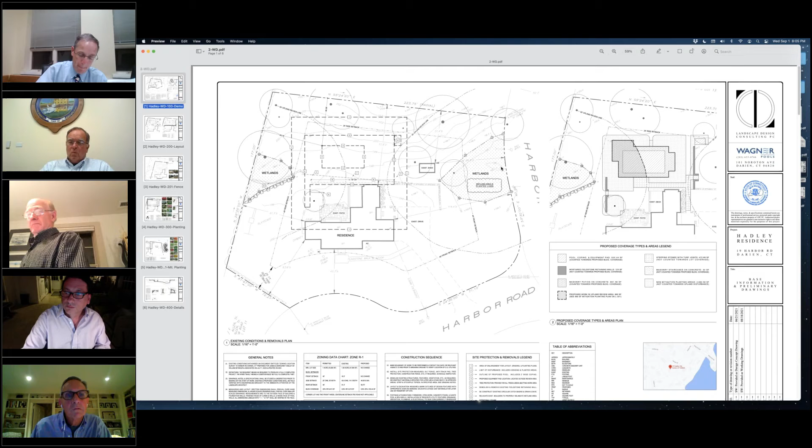It's drafted for October, that's correct. Okay, so we'll draft an approval for October, but in the meantime my question to Jeremy on October 6th will be, has Sean talked to you and have you come to some agreement? And then you guys can deal with it. Yep, great. You okay, Sean? Thank you, thank you very much. Okay.

Okay, the next item of business is EPC 36, 2021, James P. and Elizabeth D. Degnan, 19 Brush Island Road, proposing swimming pool construction in an upland review area. The site is shown on Assessor's Map number 51 as lot number 12. And Tom Nelson, you're representing the applicant.

I am indeed, good evening, Tom Nelson, professional engineer with McChord Engineering. Our office prepared the site development plan for the proposed pool. The property is in the coastal area, it is within 100 feet of Holly Pond, which is why it's before you tonight. It will require a CAM application and will be going to public hearing with Planning and Zoning Commission. With that, I will share my screen.

This is the 19 Brush Island property. This is the house constructed in 2011, which was permitted through EPC and P&Z in 2010.

There's a common driveway along the western edge of the property that serves, I think, 5 total houses now.

There's a fairly large tidal wetlands area covering much of the southern portion of the property, and hugging Holly Pond here to the east. There are no inland wetlands on the property.

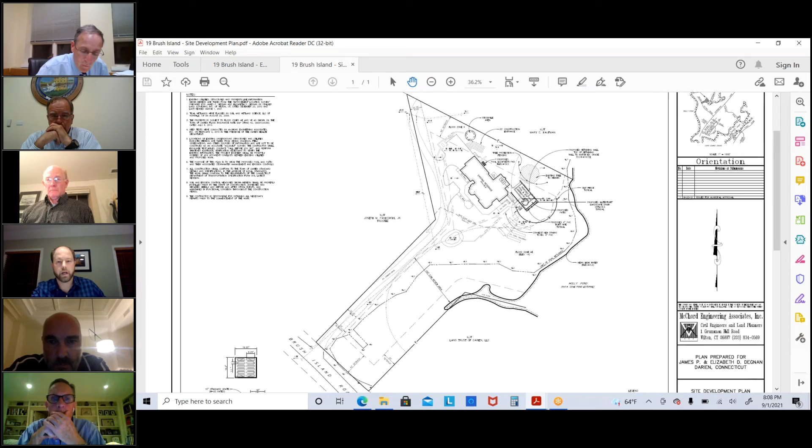The proposal is a relatively small 16-foot by 32-foot pool, which also contains the spa area, located adjacent to an existing patio, at the northeast corner of the existing house. Zooming up on that.

There's also a fairly modest patio expansion, tying into this existing patio. There'll be an additional 350 square feet of patio along the edge of the pool, located within an existing lawn area.

I did attach some pictures with the application. This is looking out towards Holly Pond. This is the existing patio, where the pool will sit adjacent to that. Same view, but looking back towards the house - there's that retaining wall. This is where the pool sits in that lawn area.

The goal is really to minimize site disturbance with this pool. You can see there's a gentle grade heading down to an existing yard drain here. The new pool will have low retaining walls on 2 sides to allow us to catch up to that existing grade without having to do a lot of earthwork. So the limit of disturbance will just be beyond these walls, and then we'll tie back into that existing grade.

There's no filling proposed. Any excavation required for the pool will be removed from the site. We will be reconfiguring the existing drainage system - this was the existing yard drain here, which will have to go away, but we're adding some new yard drains that will all tie back in to the existing pipe that goes down to that rain garden, making sure that all that impervious coverage, which is just a pretty modest expansion of the existing patio, will be treated with the existing rain garden.

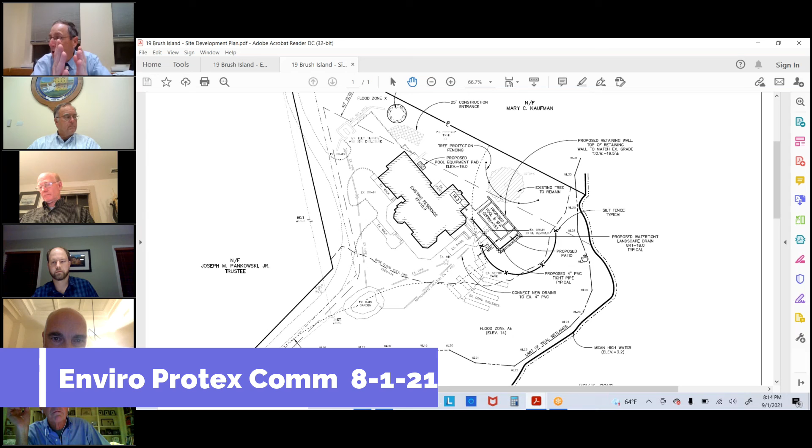You go out there and you say, oh yeah, clearly I can see what the wetlands are. It's funny, the last application you saw, Sean Walters referred to the boulders as a delineation line, and maybe through a long range that wetlands was a low area, and maybe the delineation has changed. So I think in this situation, I would say 12 years is about right. It's a low-lying area next to Holly Pond.

But you're right, Jim, it's there. Rich used to use a combination of not only aid of the soil survey, but a combination of what you see when you're out at the site. All right, thank you for that, Jeremy. Mr. Chairman, I have no further questions.

No, Tom, my only comments are, I agree with Bill Wright on the oak. That'd be a shame, and if I was the homeowner, I'd want that oak, okay, because it provides nice shade. It's a beautiful tree, and so I'm sure you have to meet his requirements, because I see the owner is on the...

But you will take care of it. You have things delineated there to be able to keep the oops factor out of when the big equipment comes in, because one of my questions was, you have rain gardens, etc. It's hard to bring heavy duty equipment in there, and you're going to need a large backhoe to dig down, etc. So you think you can handle that and protect the oak and protect the rest of the property?

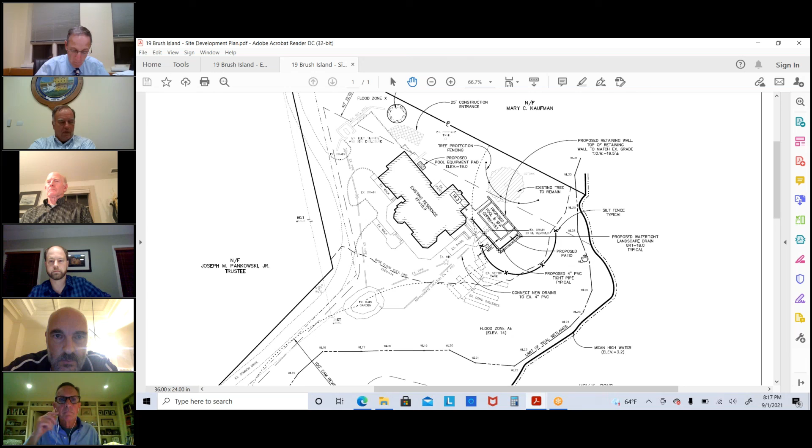Yep, so okay, other than that, I'm okay with this. So Jeremy, if you could write a draft approval for that, for October. Yep, I'm okay. Great, thank you. Thank you, Tom.